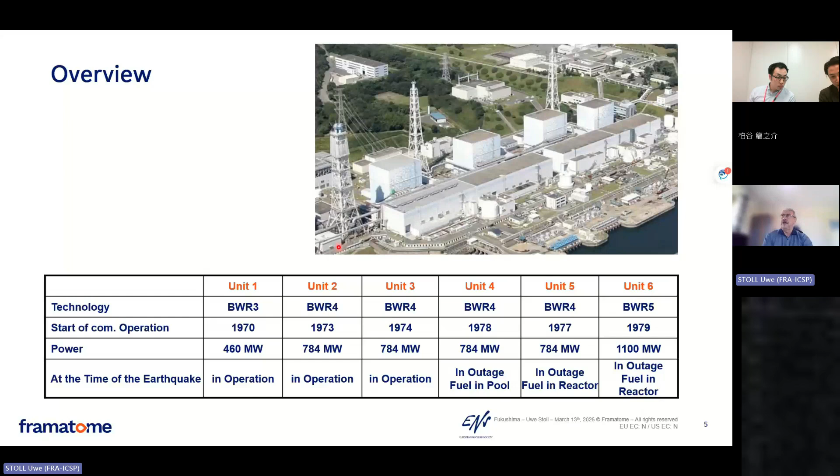There are different stages. Three of the units were in operation. Units 1 to 3, while 4, 5, and 6 were in an outage. There was a special case: in Unit 4 there was an inspection of the reactor pressure vessel, and there was no fuel inside the reactor. On the picture we can't see Units 5 and 6, they are a little bit to the right of the picture. So sorry for this one.

I don't have it in English, so I use the German one that explains what happened. You see on top how the plant is located: the reactor building, the turbine island, the cooling water pumps, and zero, which means normal level.

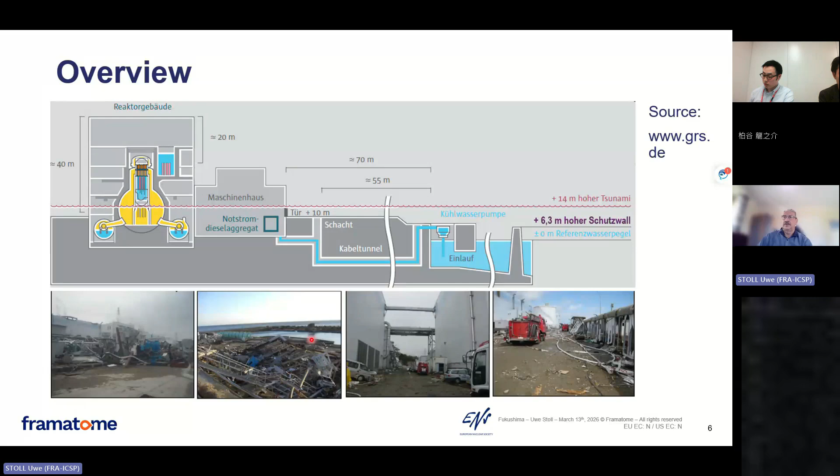The requirement in Japan for the Fukushima design, for tsunami design at the Fukushima site, was 5.7 meters. There was a wall about 6.3 meters, but the real tsunami that happened was 14 meters. So we got the flooding of all the cooling pumps, the flooding of the turbine island where the emergency diesel generators were located, and a lot of destruction in the switchgears and so on.

So now a little bit more in detail, not too much. It starts with an earthquake on the 11th of March at 14:46, with a magnitude of 9. This was the biggest earthquake recorded in Japan until now. The power grid in northern Japan collapsed, not completely - Daini had one of the lines available, which was good for the plant. But everything in the plant worked well, so there was a start of the emergency diesel generators, and everything worked normally from all we know today.

Around one hour later, a tsunami - and in reality it was 3 waves - reached the plant with a real height of 14 meters, as I mentioned. The flooding of the plant area caused us to lose the emergency diesel generators, the cooling water, and the electricity supply. So it was a complete station blackout. But there were some passive systems in the plant that at the beginning made available the cooling of the core.

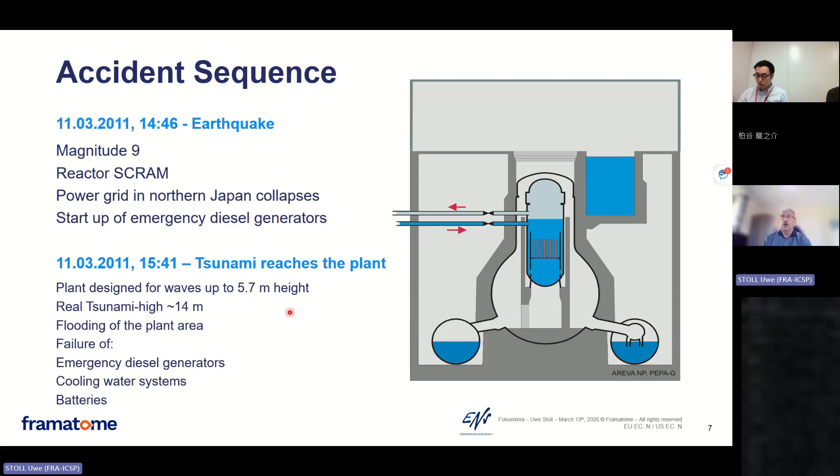This passive system was lost in unit 1 on 11th of March, and the other one a little bit later, 2 days later. In this case, the plant is designed so that heat transfer goes via the safety valves into the condensation chamber.

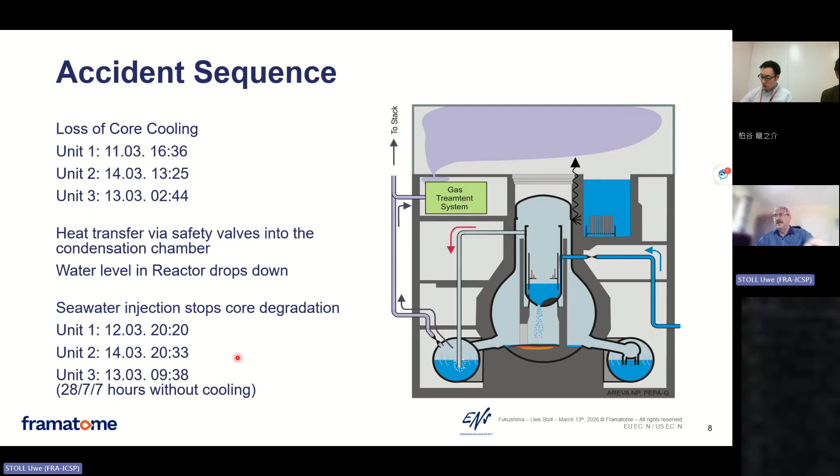But when you make this type of cooling, you are losing the level in the reactor, and sometimes you have no more water in the core, and the core starts to melt. So this was stopped by the team on site with seawater injection.

I'll come later a little bit more to that. Due to the fact that we injected all the heat inside the so-called primary containment, the pressure inside this primary containment goes up above the design pressure, and there were leakages in this primary containment.

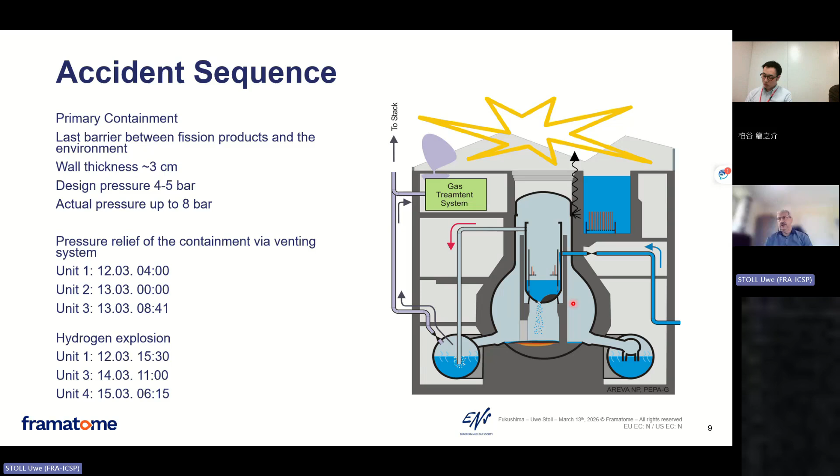With these leakages, the hydrogen that comes from the water-zirconium reaction comes into the building around. At the end, we have seen hydrogen explosions in unit 1 and 3, and also in unit 4, where no fuel was in the reactor. But what exploded was not the containment, it was the building around.

So this was at the end the situation we have at the 15th of March 2011. You see unit 1 destroyed, the building with hydrogen explosion, unit 3 heavily destroyed, and even unit 4. It was a big question today.

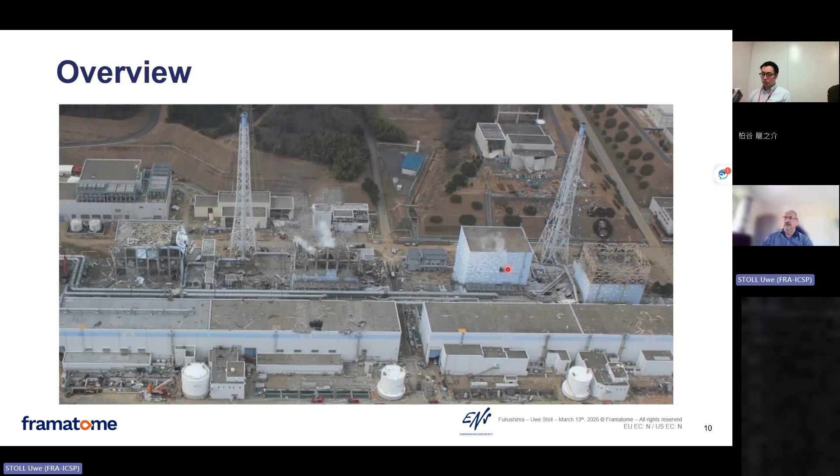The explanation is you see here a common stack with connection to unit 3 and 4. The hydrogen comes via this connection from unit 3 to unit 4, and at the end leads to an explosion of unit 4. Unit 2 had no explosion because with the explosion of unit 1, there was a hole in the building, and due to this hole, there was no accumulation of hydrogen to an extent that leads to an explosion. So this is the situation we have seen 15th of March 2011.

What we know today about the fuel is in unit 1, which was 28 hours without any cooling. Most of the fuel is no more in the reactor, but is inside the containment, has even destroyed the concrete, but has not gone beyond the primary containment.

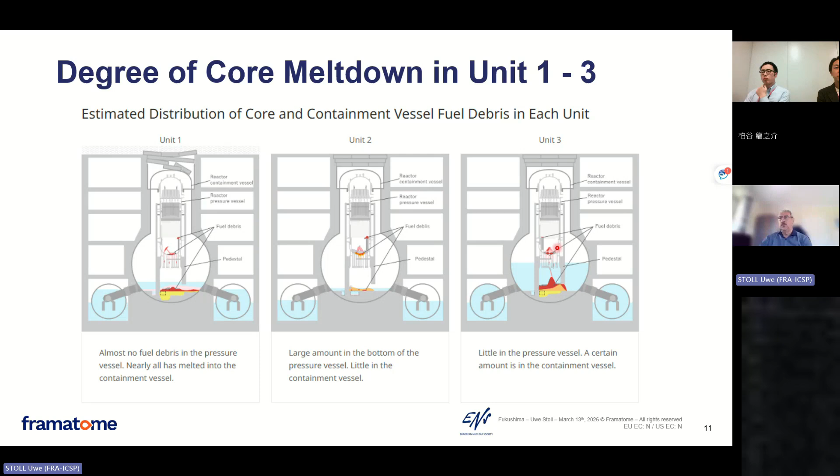In unit 2, there is more fuel still in the reactor, but there's also some fuel in the containment, with no destruction of concrete. Unit 3 is something between unit 1 and 2. So this is what we have seen on site, and what starts afterwards in all the countries, in all the international organizations, is looking into the lessons learned.

The second one, and this is more also of interest for a lot of people, is that Fukushima had fulfilled the Japanese regulations for tsunami. So then I had some discussion about how safety is defined. And what I learned from one of the leading European regulators, saying, I will give a license not because the plant is safe, but because the plant is fulfilling requirements.

For safety itself, it's the operator who is responsible. It's an interesting lesson learned, because how often is it used to frame that 'my plant is safe because it fulfilled the requirements.' And this is my personal lesson learned from this one: it's not because it fulfills the requirement that the plant is safe. So we have to think about the safety.

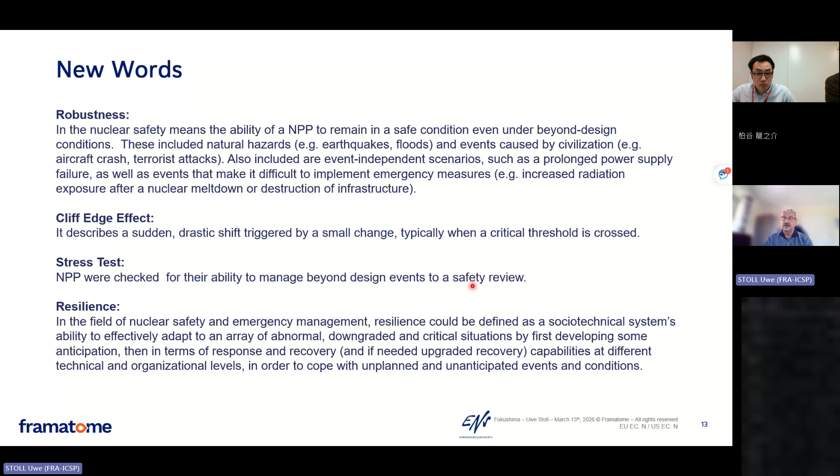In the last 2 to 3 years, a new term has come up in nuclear safety discussion: resilience. Resilience, in the field of nuclear safety and emergency management, means a socio-technical system's ability to effectively adapt to an array of abnormal, downgraded, and critical situations. When we talk about robustness, we're discussing things we know - earthquakes, tsunamis. Resilience looks at things we don't know today, and how we are prepared for them. This discussion is just starting in the agency, and I expect there will soon be some papers about this new point. This is one of the lessons learned from Fukushima.

Let's go to the different things that happened and the new requirements coming up after the Fukushima accident. Even in 2011, the agency drew up an action plan to improve safety worldwide.

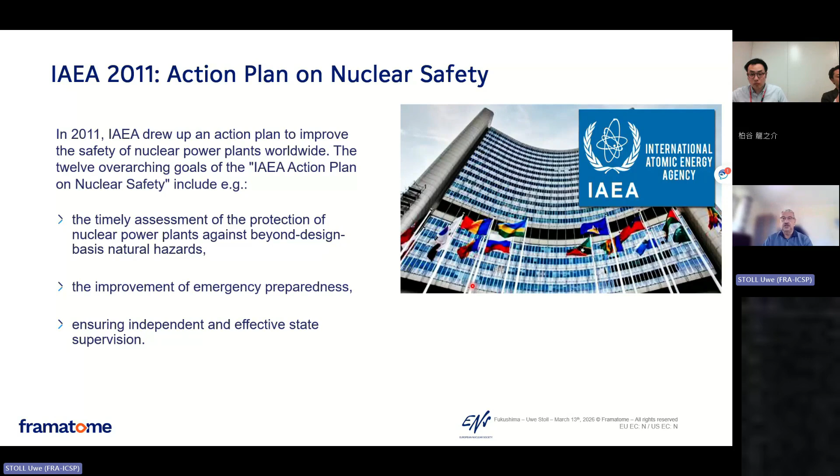There was a request for timely assessment of protection of nuclear power plants against beyond design basis natural hazards, and a request for improvement of emergency preparedness. One of the non-technical requirements was to ensure independent and effective state supervision. For this reason, in Japan we now have the so-called NRA, Nuclear Regulation Authority, but there were also changes in other states, not only in Japan.

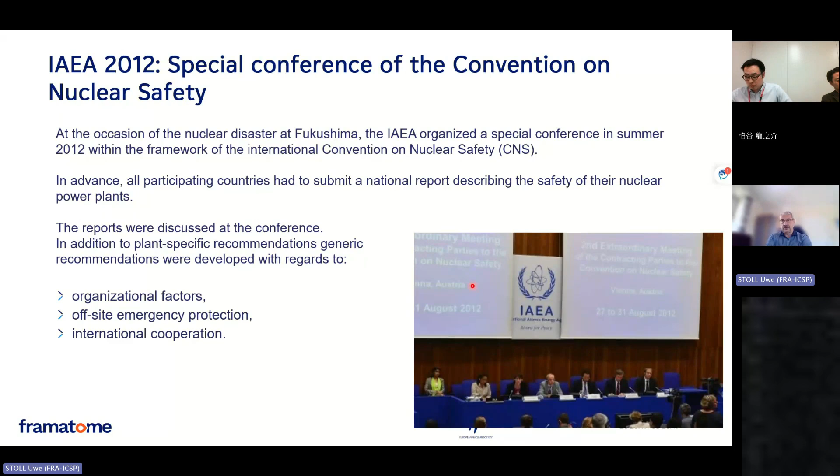In 2012, there was a special conference of the Convention on Nuclear Safety. They didn't call it a stress test, but every member of the CNS was requested to submit a national report describing the safety of their nuclear power plants. These reports were then discussed in the conference. In addition to plant-specific recommendations, there were generic recommendations covering organizational factors, off-site emergency protection, and international cooperation.

The agency typically works with safety standards, and 5 safety standards were adapted, leading to the so-called Vienna Declaration made in 2015 with requirements we have today. The first is that new nuclear power plants must be planned and built in such a way that severe accidents are prevented. Nevertheless, in the event of a severe accident with possible release of radionuclides, there must be no long-term contamination outside the plant. Sufficient time must be available for protective measures of off-site emergency response. Clearly, when you read this, it's an outcome of the lessons learned from Fukushima.

For existing nuclear power plants, safety must be regularly reviewed and improved. Every 10 years a periodic safety review has to be made for existing plants, looking not only inside the plant but also outside it. One example is from the stress tests, where people looked at the design requirements, typically regarding flooding. Some plants were located on rivers, and after the plant was built, a dam was built a little higher up the river. It wasn't considered what happens if this dam breaks and you get higher flooding. So a safety review isn't only internal to the plant, it also looks at the external preconditions of the site.

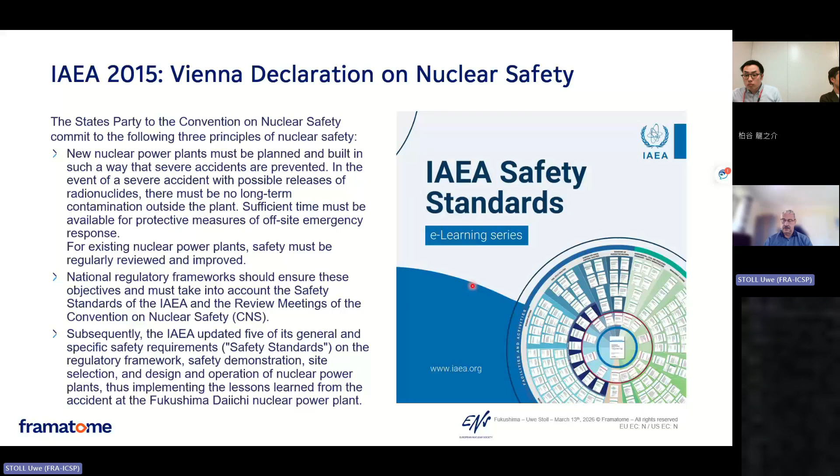The next point in the Vienna Declaration was that the national regulatory framework should ensure these objectives and must take into account the safety standards of the agency, with a review every 3 years by the CNS. Five safety standards were adapted on safety demonstration, all within the framework of lessons learned from the accident at Fukushima Daiichi.

Now coming to the level of the European Union. In 2011, the responsible Energy Commissioner requested a stress test for all 143 nuclear power plants in Europe.

So the European Nuclear Safety Regulators Group, called ENSREG, defined the scope of the test, and the member states write a report about the safety of their plants. That was, again, a stress test, looking at what happens in the power plant—first of all, if the external event is higher than in the design, and if there are changes in the precondition of the site, as I explained, for instance, with an additional dam in the river.

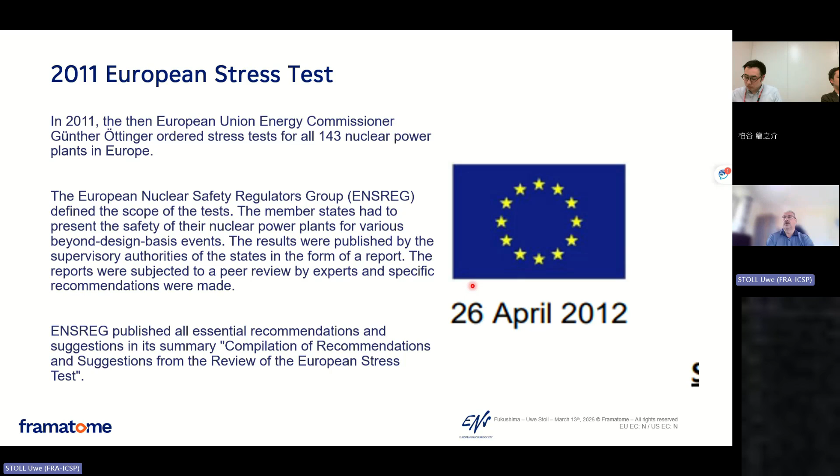This was published in a report called Compilation of Recommendations and Suggestions from the Review of the European Stress Test.

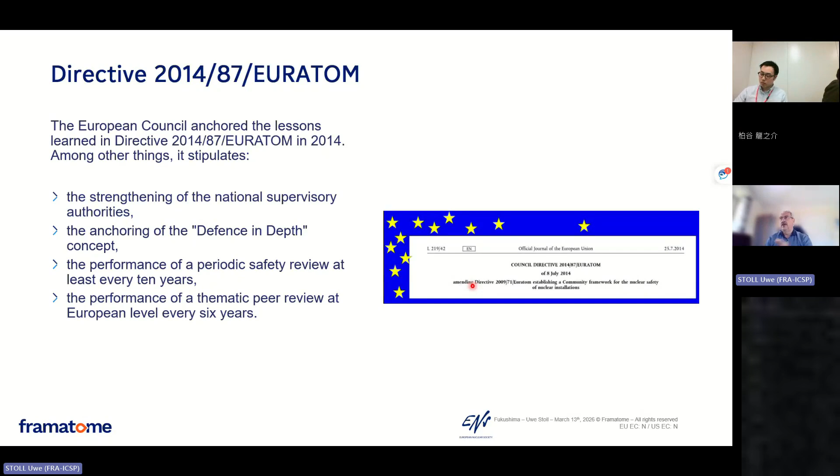There was also a directive from Euratom, with practically the same elements: the strengthening of national supervisory authority, the anchoring of the defense-in-depth concept—which wasn't new, but was more deeply defined—the performance of periodic safety reviews at least every 10 years, and the performance of a thematic peer review at European level every 6 years. The last one was on fire protection; the first one afterward was on aging. So we have now had two of these peer reviews.

There exists another organization called WENRA. It stands for Western European Nuclear Regulators Association, but today it's more or less a worldwide association of regulators.

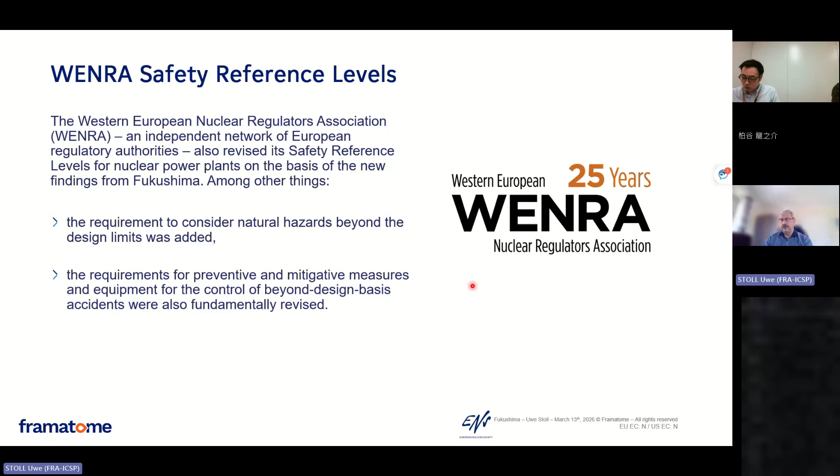There were also some requests, and you can find the same things as I mentioned before: the requirement to consider natural hazards beyond the design limits, and the requirements for preventive and mitigative measures and equipment for the control of beyond-design-basis accidents were fundamentally revised. So there was a lot of new requirements here.

And now coming to what happens in the nuclear power plant. Practically every plant in Europe and in the world has looked at upgrades to improve the situation for longer power outages, for natural disasters, for severe accidents.

And this is not only something inside the plant. I know some plants in the world looked at this—there was only one road to access the power plant, and typically after heavy rain it became slippery, so there was no access via this road. They created the possibility for people to reach the power plant by ship.

But a lot of things were also made inside the power plants. First of all, emergency power supply.

In many plants, mobile equipment was added—not only mobile emergency diesel generators, but also access points that were created. It doesn't help you so much to have a diesel generator when you have no plug to connect it to the plant. So this was a system.

It's not only diesel generators—mobile pumps were added too, to get the possibility to pump even when you've lost all energy for a longer period.

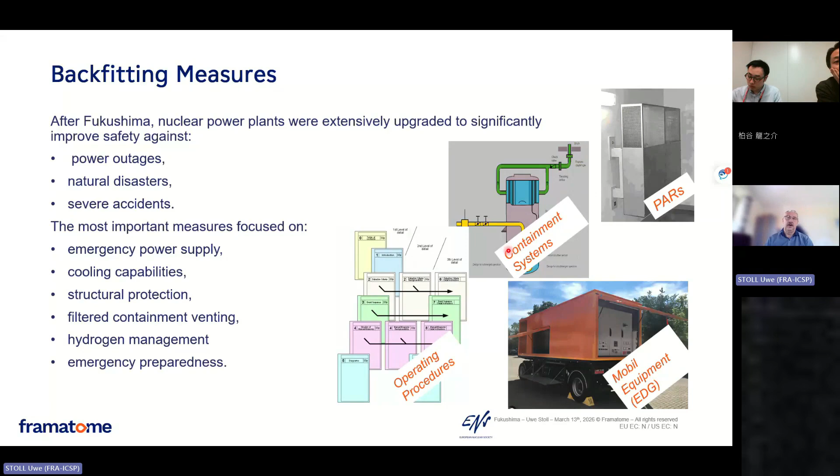And the last thing I would show is to go over to the Japanese colleagues in 2022—I was invited by the NEA, in the framework of the OECD NEA, to the Fukushima site.

And I will stop here and now give over to my colleagues from TEPCO.

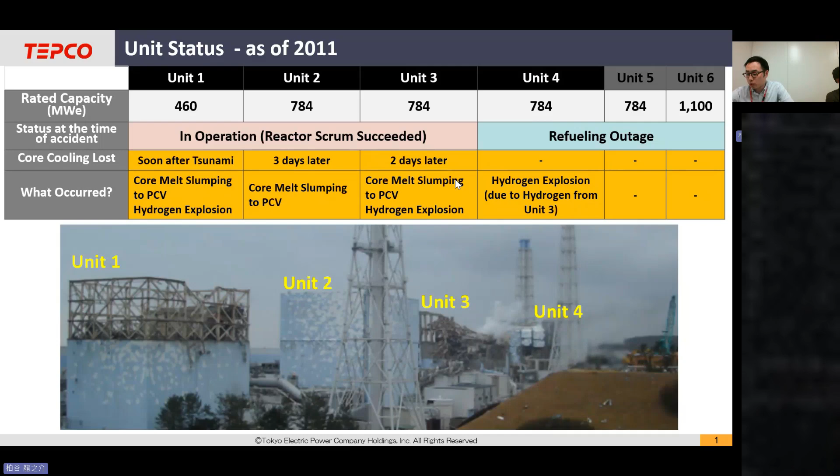In the early stages, most efforts were devoted to addressing the issue of contaminated water management. Today, the situation has significantly improved, and the discharge of ALPS treated water began 3 years ago.

In addition, the spent fuel stored in the fuel pools of the accident-affected units had to be removed. We expect to complete the work by the early 2030s. Given this background, attention is now turning to the even more challenging task of retrieving the molten fuel debris.

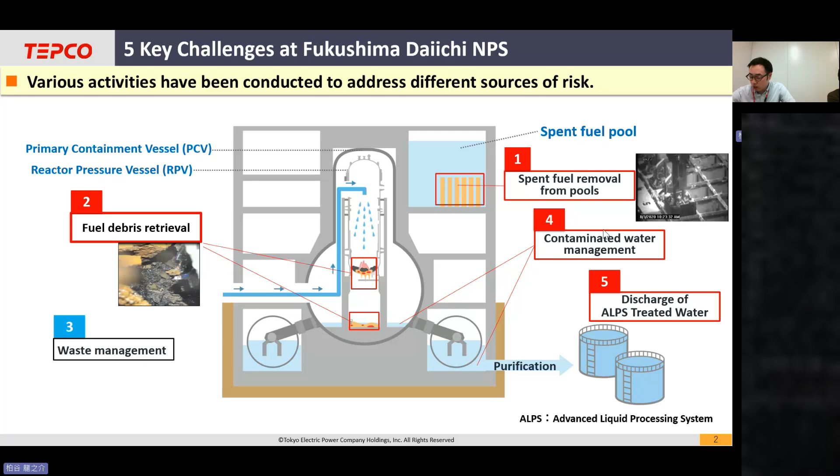And now I'd like to go through these topics. The first topic is spent fuel removal. Spent fuel is stored in pools at the top of the reactor buildings, and its removal is a critical task to reduce the risk of radioactive material being released in surrounding areas.

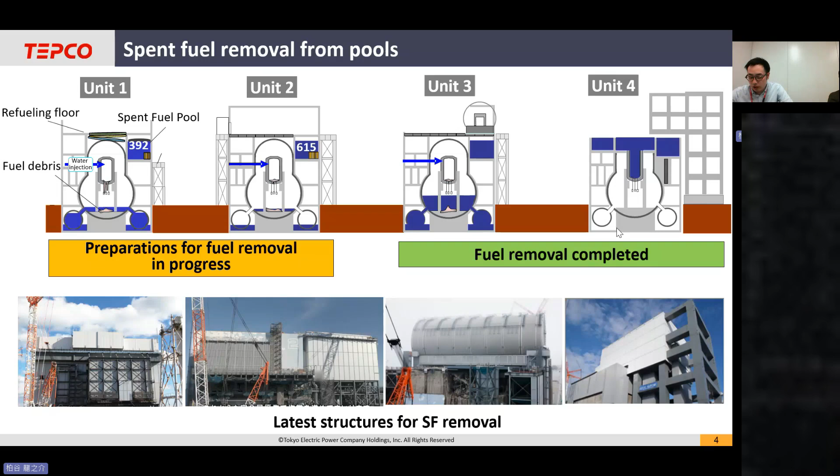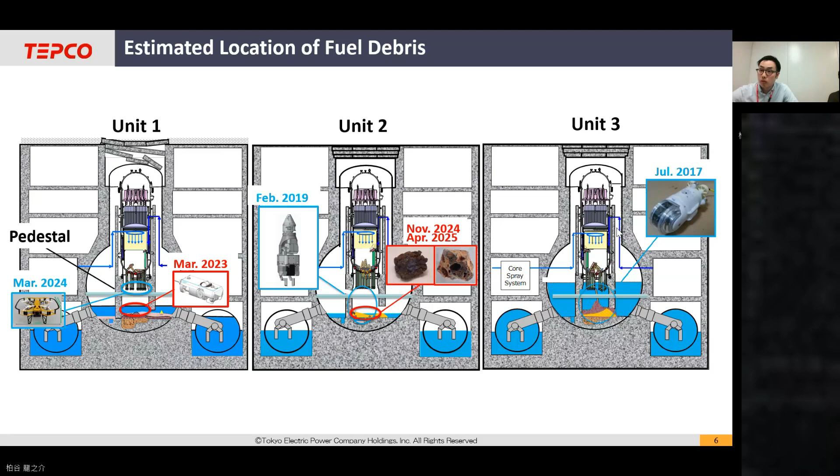The PCV, primary containment vessel, internal investigation at Unit 1, and the trial fuel debris retrievals conducted at Unit 2. I will start from the Unit 1 investigation result.

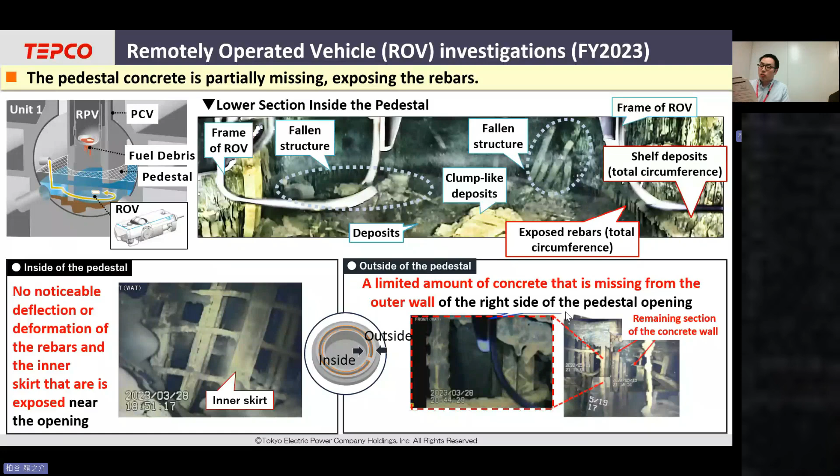Two images at the bottom of the slide were taken near the pedestal opening, from both the inside and the outside. From the inside image on the bottom left, we assessed that there is no noticeable deflection or deformation of the rebars or the inner skirts. From the outside image, within the area observed, only a limited amount of concrete is lost on the outer wall.

Additionally, since the horizontal movement of the RPV is limited by surrounding structures, we predict that there would only be limited slanting. Slanting refers to a condition in which the RPV becomes severely tilted, resulting in significant damage to the PCV and itself. Therefore, our assessment has concluded that even if there was an impact on the RPV, there would be no impact on the PCV, and a containment function would be maintained.

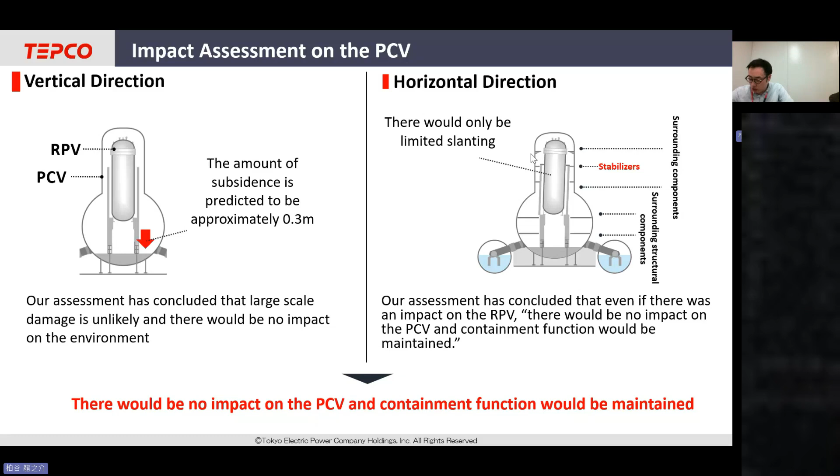We also ran an exposure impact simulation. Two main assumptions of the scenario are: the RPV subsides 0.3 meters, and a large opening was created in the PCV. Even in this case, the exposure at the site boundary would be a maximum of 0.04 millisievert. This means that the exposure risks to the surrounding environment would be extremely small.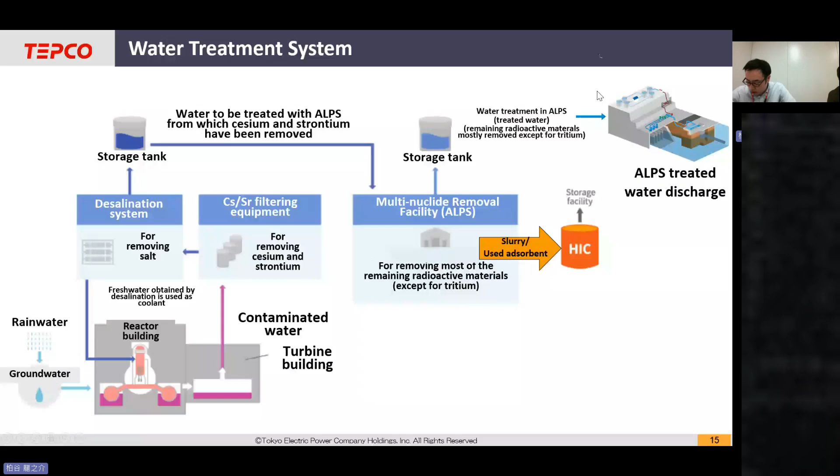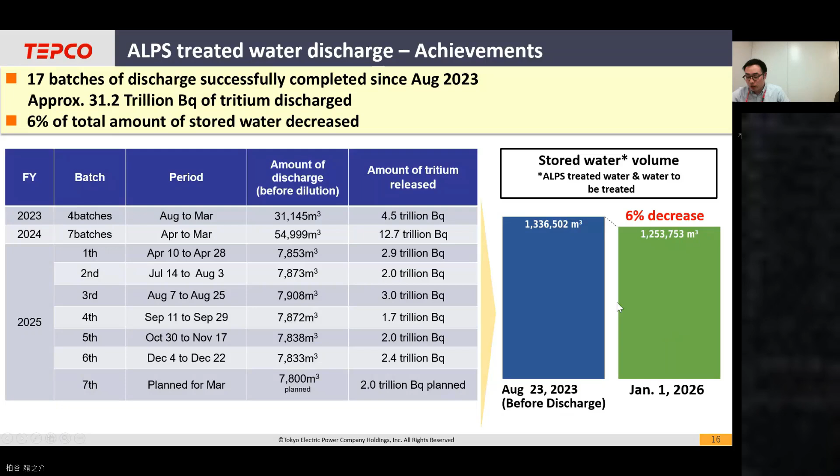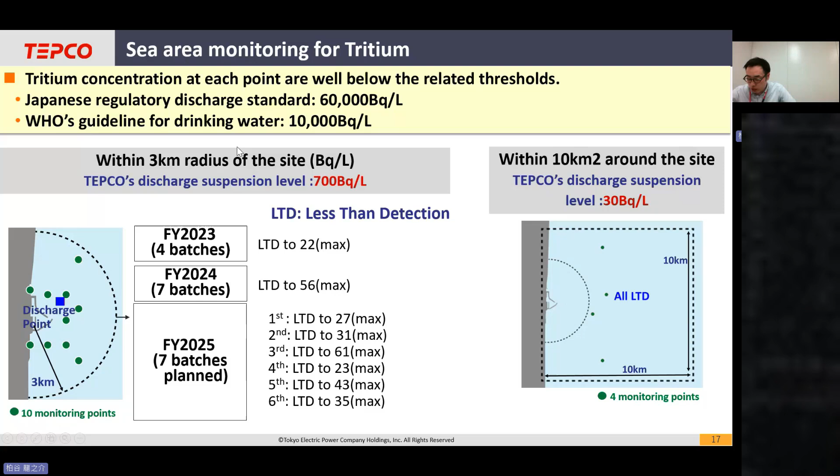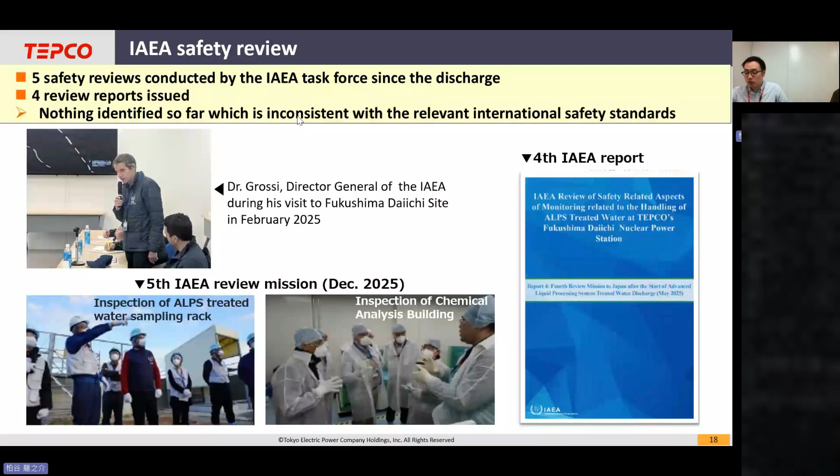Details around water treatment and ALPS treated water discharge are available at our ALPS treated water portal site. You can find information on discharge data, including storage, nuclide analysis, and sea monitoring results. Please have a look if you are interested.

In Japan's National Strategic Energy Plan, revised after the accident, the government stated that Japan would reduce dependence on nuclear power as much as possible. In parallel, regulations concerning nuclear safety became significantly stricter. Two symbolic developments in this movement were the establishment of the Nuclear Regulation Authority (NRA) and the introduction of new regulatory requirements. From the next page onwards, I will explain what the new regulatory requirements are and how TEPCO has addressed these requirements.

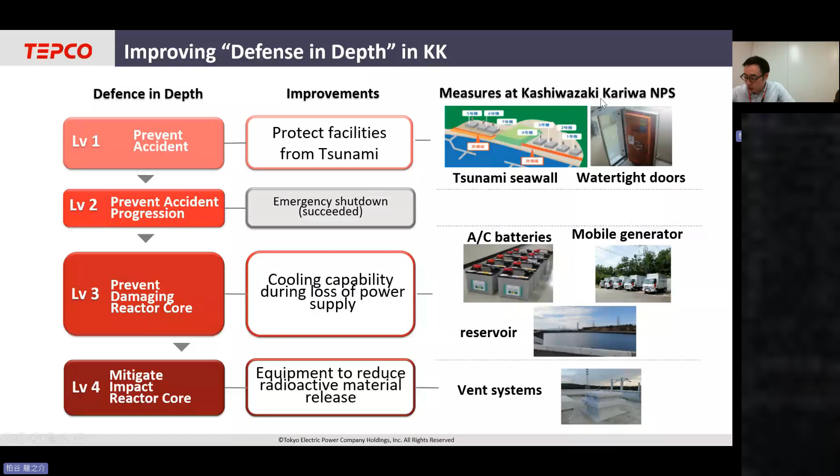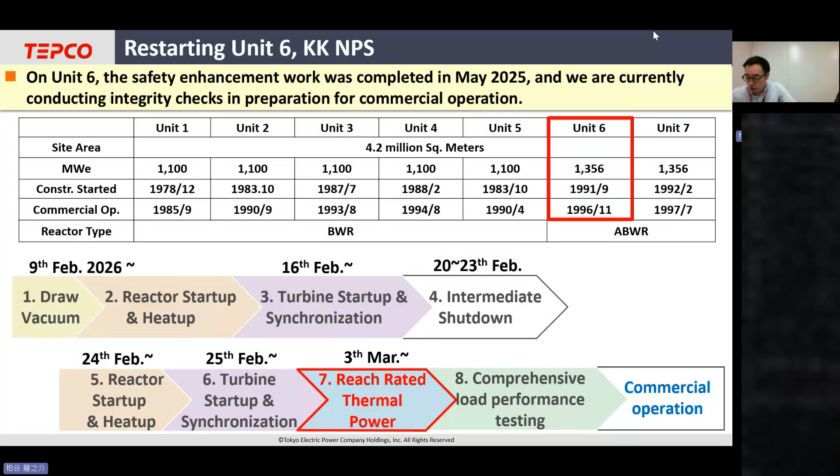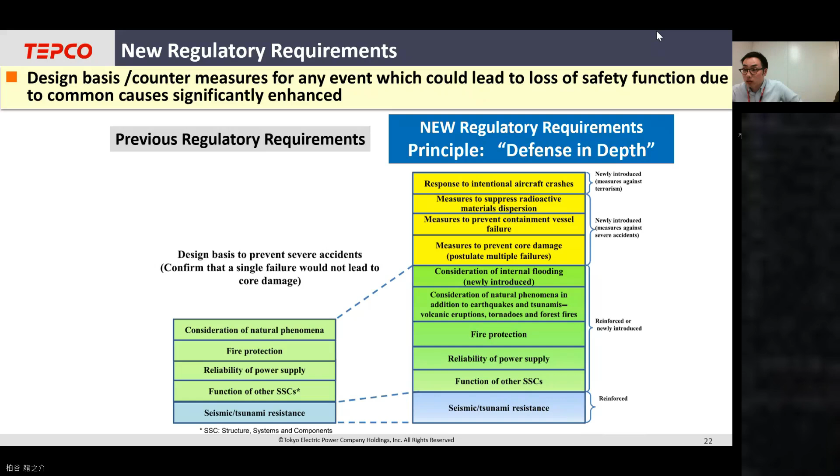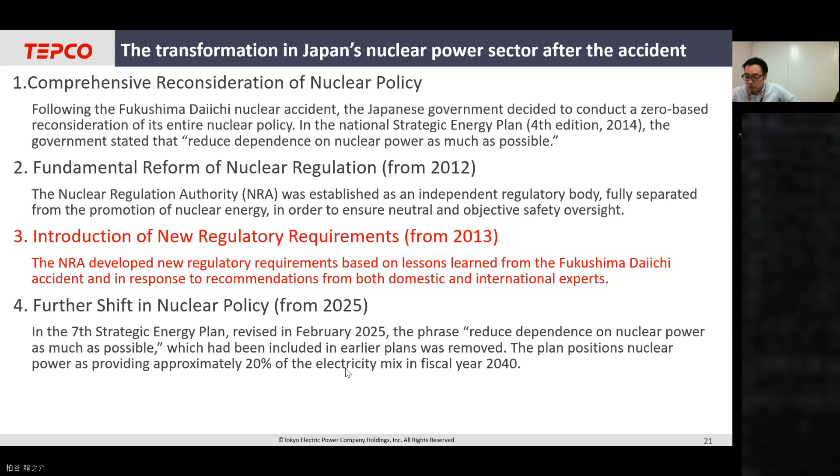In this context, as the company responsible for the Fukushima accident, we are committed to applying the lessons learned and continuously enhancing safety at all of our nuclear power stations. We will continue to demonstrate through our actions and safe operations that safety remains our highest priority. Thank you.

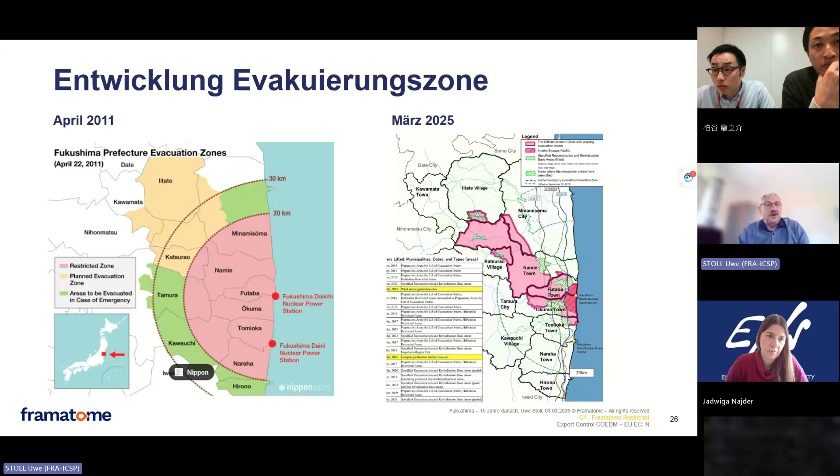A lot of work has been done, and is being done further to reduce radioactivity. We have to keep in mind that radioactivity naturally reduces due to the fact that the half-life of most of these elements is less than some years. So a lot of area is now open for people to go into.

Sometimes I call it a touristic hotspot now to have a look at Fukushima, because when you come from Tokyo, from the south, you can practically see the plant - it's no longer restricted on that. So there's a lot of success, but nevertheless there's a lot of things still to do, from an external view, not TEPCO.

So let's finish this topic with the TEPCO colleagues. How have the evacuated people been compensated for the evacuation?

Yes, the compensation to the people who evacuated from the area is being continued, and TEPCO supports that - paying the compensation and supporting the people who are suffering from those events.

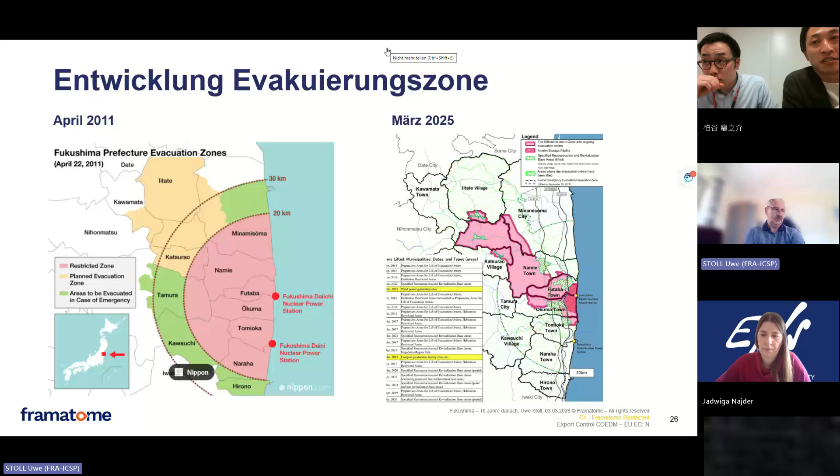Yes, okay, thank you. There is a question from Samuel Kitchen asking about the future of the Fukushima site. In the UK, there was an incident at the Sellafield site, which later became the facility for the processing of waste and decommissioning or cleanup. Is there any plan for Fukushima Daiichi to become something similar, or what will be the future of the site?

It's a very difficult question, but the answer is still being considered, and there's no fixed plan for how the plant should look like at the end. So we are currently trying to develop a long-term plan for the site, whether we should consider the end state, whether it should be a fully decommissioned site or repurposing it into a different facility, or so on.